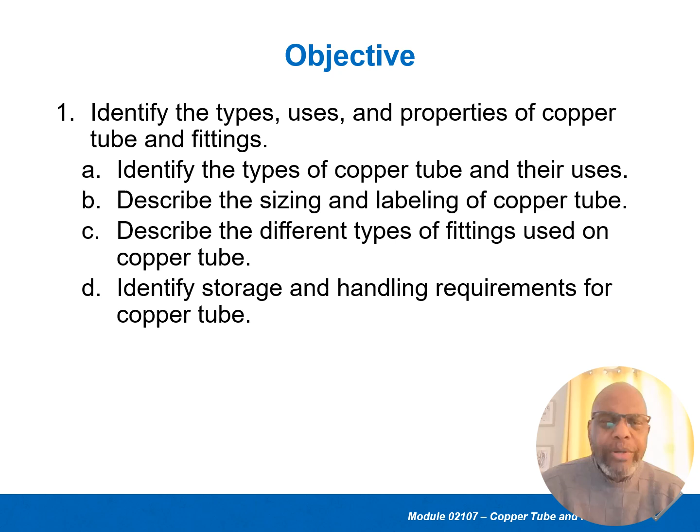This section here, we're going to be covering types of copper tubing and fittings. The objective of this section is to identify the types of copper tube and their uses, describe the sizing and labeling of copper tubing, describe the different types of fittings used on copper tubes, and identify storage and handling requirements for copper tubing.

There will be a performance task in this section, and we're going to select the types of copper fittings that's used in the plumbing industry. We're also going to identify types of fittings, valves, and their uses, and discuss why it is done a certain way.

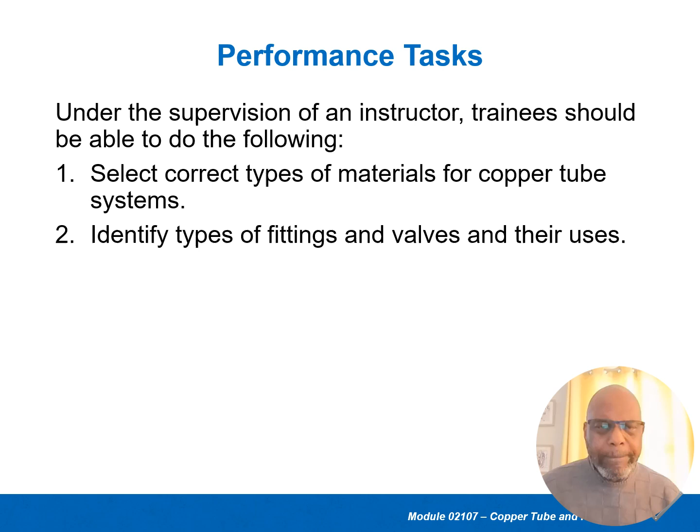So again, we said types of pipe. That's what its categories are. We find copper piping, and we call it type. The type really has to do with the wall thickness and the amount of pressure the pipe can actually handle. Actually, we call it tubing when it's copper, but if you call it pipes, other people will know what you're talking about. The true name is called tubing.

The history of it's been used for quite some time. It was more considered high end, but after years of use of other types of pipes, they found out that copper tubing has some great characteristics, such as it doesn't rust out.

It doesn't build up minerals on the inside of the piping, such as other pipes like galvanized pipes, which hot water lines will completely plug up with minerals. The second thing, black pipe will rust out in a short time. So copper doesn't have those characteristics.

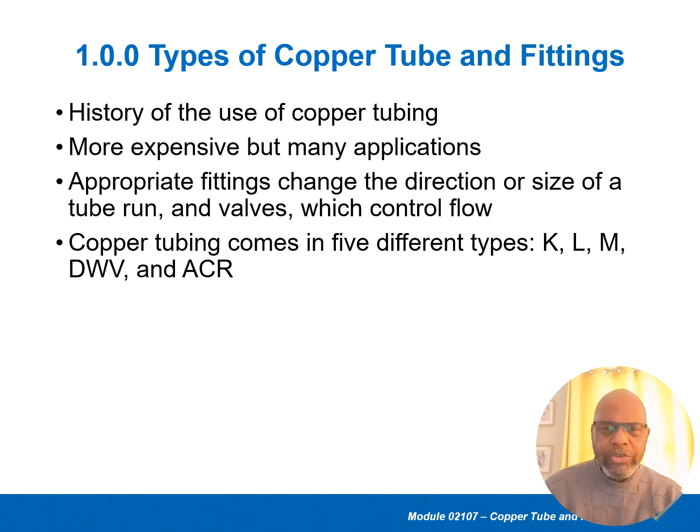Here's a warning: always check for electrical grounding when working with copper tubing. Copper water pipe lines are often used as an electrical ground, and that's true.

They will ground the water pipes because it goes into the ground for hundreds or thousands of feet, going across the ground to give a really good connection. So if there's ever a short into the house, something becomes ground faulted, it can dissipate that energy into the ground. Water pipes are always grounded, unless it's plastic piping such as PEX tubing, which may not be.

There's no reason to ground plastic pipe because it's an insulator. But if it's copper pipes or galvanized pipes or metal pipes, it will be grounded. So copper water supply lines are often used as electrical grounding.

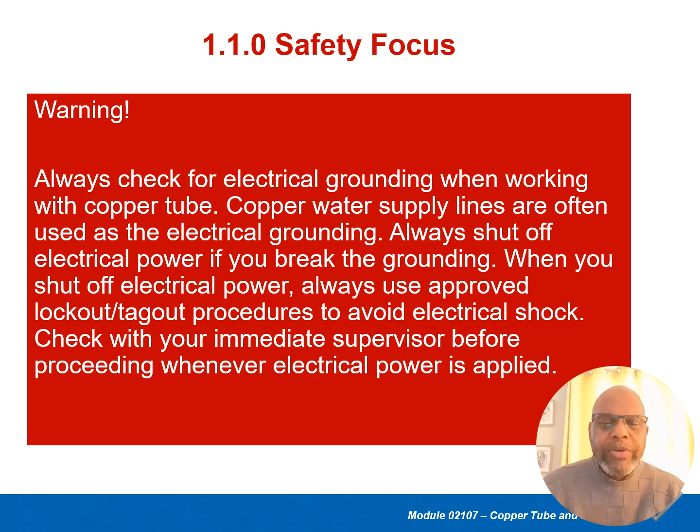Always shut off the electrical power if you break the ground. When you shut off the electrical power, always use approved lockout tagout procedures to avoid electrical shock. Check with your immediate supervisor before proceeding whenever electrical power is applied.

Okay, we're looking at the sizing. I explained the difference already. Here's the thing: the outside diameter of the pipe does not change, but the inside diameter will change. So tubing sizing varies depending on the type of copper tubing.

Types K, L, M, DWV use nominal, or what we call standard sizing. In other words, the outside of the pipe does not change, but the inside of the pipe will change. This means that the outside diameter is always 1/8 inch larger than the nominal size. So the nominal size will be the inside diameter - it's the approximate measurement in inches of the inside diameter for most copper pipes.

Type ACR uses actual outside diameter, and that's true. So HVAC, heating, ventilation, and refrigeration technicians will always use the outside diameter, and ACR pipe comes in a lot more sizes than plumber pipes, because refrigeration systems require sizing the piping correctly for the flow rate of the refrigerant going through it. So again, HVAC technicians use the outside diameter while everyone else uses the inside diameter as their nominal size.

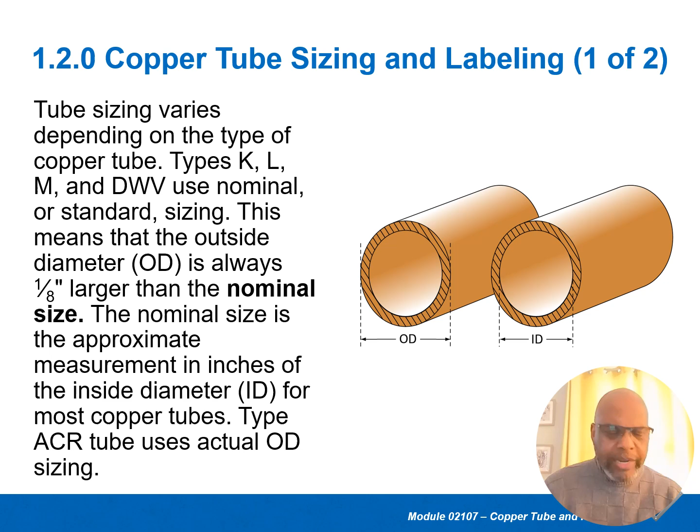Another thing is to be able to recognize the type of piping - yes, it's printed on the pipe, but to visualize it very quickly, they will color code the printing on the piping. So you will know at a glance what type of pipe you have. Type K would be green printing, L would be blue printing, type M would be red printing, DWV would be yellow printing, and ACR would be blue, because like I said, it's typically type L. But you can find type K ACR too, and the printing then would be green.

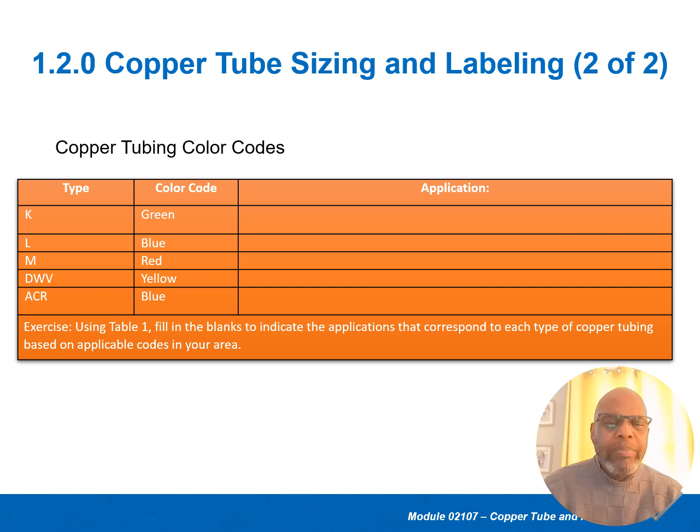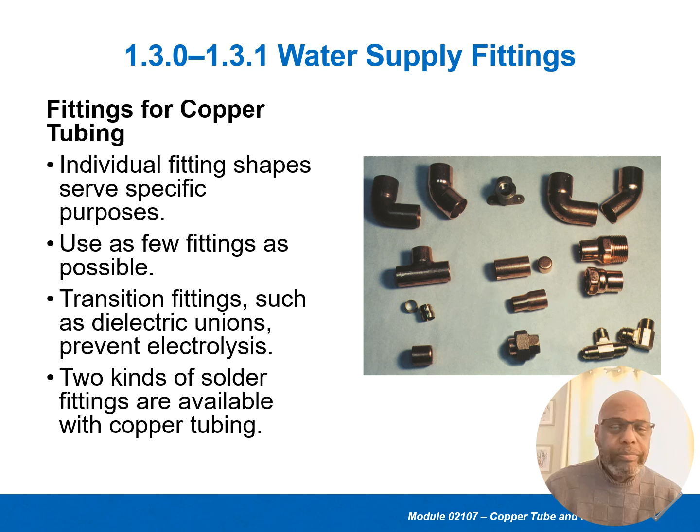These are common types of valves that you can use, and these valves are usually bronze or brass that you can use with copper. So it's the same type of valves you've seen for other uses, however it would be brass, so it doesn't have that electrolysis.

This particular valve here is a compression fitting. The valve is brass or bronze, but it will have what we call a ferrule. A ferrule looks like a wedding band - it's kind of tapered, and this nut on it would tighten up on both sides to be able to connect it to the copper pipe.

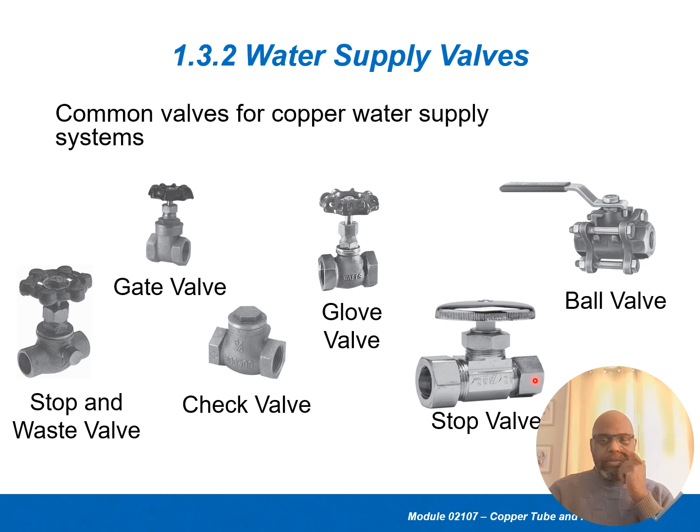So that compression fitting is a very good fitting. It's tight. The nice thing about it is it's easier to remove than a copper fitting, because all you have to do is unloosen this nut here, and you'll be able to remove the pipe from the fitting.

DWV fittings, again, these are light duty fittings that are designed for drain, waste, and vent, and they allow liquid and other materials to flow smoothly through them. Copper is a really smooth material, and it has very little resistance compared to like galvanized pipe or black pipe.

And because of copper, the nominal size inside of it is not as large as a black pipe or galvanized pipe. So that's why you can have two different sizes, or it looks like, well, physically it's two different sizes. If you look at a half-inch galvanized pipe and a half-inch copper pipe, that copper pipe is a lot smaller - it's probably almost about half the size of it.

But the galvanized pipe is actually larger because of the resistance inside of the pipe, so it's actually larger than a half inch. So if you've got a half inch galvanized pipe, the inside diameter is definitely larger than a half inch in physical size.

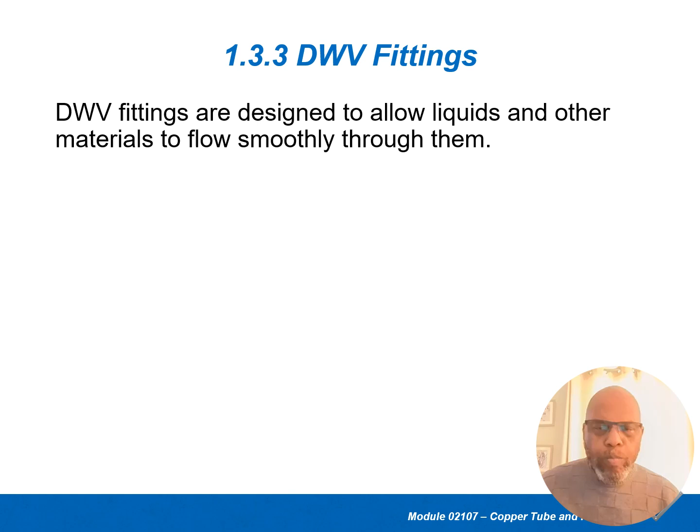So these are some other fittings that you're going to find in a field. Sweat fittings are common. Now they're coming up with a lot of other type fittings, these press fittings, used to join pipes together with a lot less effort without sweating, to speed up time. Some of these pressed fittings work extremely well, and it's a fraction of the time to install them. So you can pipe in a job a lot faster than in the past. So press fittings is one of them.

A bullhead tee, there's mechanically formed tee connections. On the inside of it there would be like a ring that actually holds the pipe together, keeps it from sliding off, keeps it from coming apart. There's an O-ring inside of it that creates a mechanical seal and holds the pipe. Of course these fittings are a lot more expensive than a normal sweat tee. But here's the difference: the time you save in labor. If you're paying somebody to pipe in a job, they're journeymen making very good money, and if you can help them complete the job in a lot less time, that time savings will offset the cost of the fittings by far.

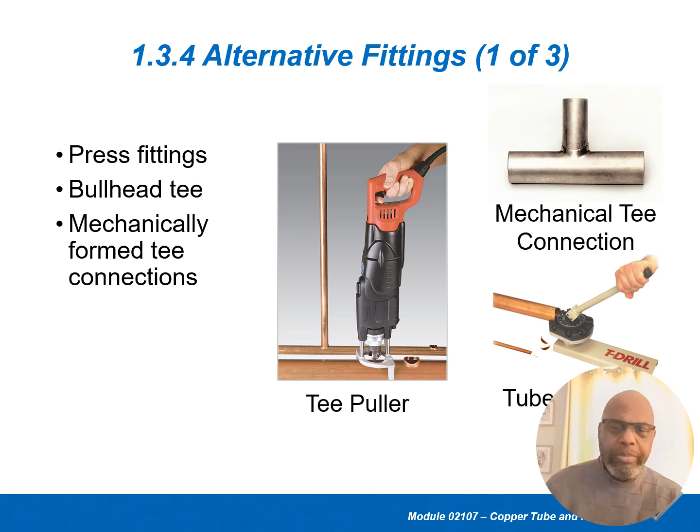These are what some people call shark bites - shark bite is a brand, but other brands make these too. These are push-on type fittings that you don't need a special tool to crimp. You just slide it on and it bites into it. It comes in all different types of fittings, so whatever fittings you can use with regular tubing, you can use with shark bite for the same thing. These are just even more expensive.

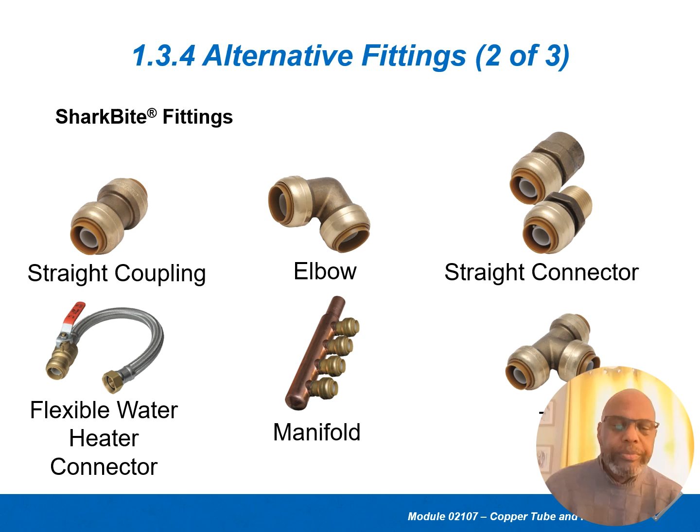Okay, these are the press fittings - these are copper fittings. This is an elbow, this is a reducer, this is a tee, all the same fittings. It looks a little different because the O-ring inside of it will seal. However, you cannot just slide it on, you have to use a tool to crimp that fitting around the tubing and it will seal it. The tool itself is expensive. I wouldn't buy the tool unless you do this on a daily basis, doing construction, because you end up spending over $1,000 easy for the tool and the fittings. You could just buy the sweat fittings and solder them in instead.

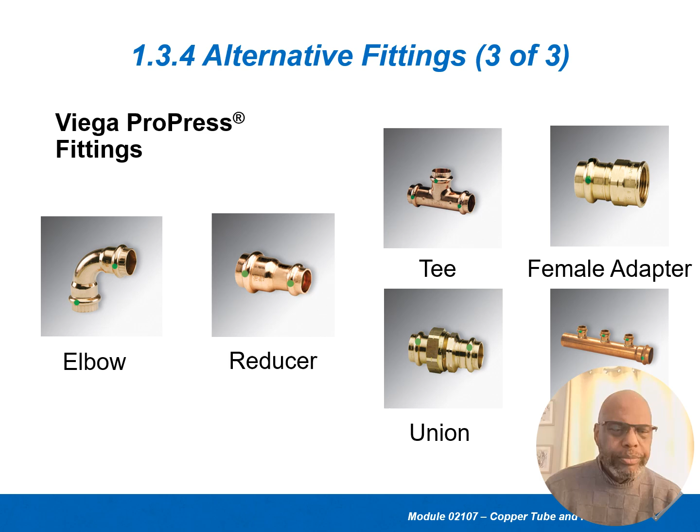Warning: always work under the direct supervision of your instructor or foreman, and always practice safety precautions to protect yourself and your coworkers from injury and to prevent equipment damage. Do not try to do any work that you have not been specifically trained to do. The reason why - you might make a mistake. You may cause harm to yourself, harm to someone else, or harm to the equipment. So again, if you don't know, ask for training.

For example, do not operate valves unless you know exactly what the results will be. Before you work independently on a system, you must know the temperature and pressure conditions that exist at every point of the system, and how those conditions can be affected by malfunctions, by the valve being in position or out of position. And that's true - I've seen guys do things and not realize what was behind their actions. I've seen things go wrong because someone opened up something or turned something on, not knowing what the outcome would be.

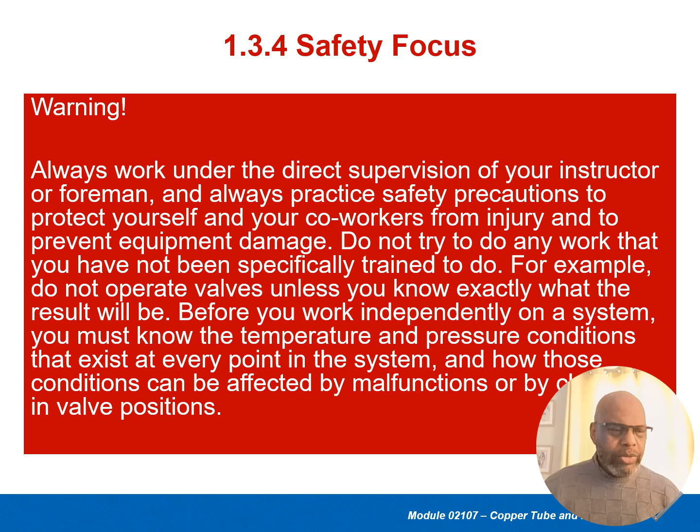Material storage and handling - just like any other pipe, we should store it properly, especially copper pipe, because it can oxidize. We see a brand new penny is nice and shiny copper finish, but an old penny is dark and dingy - that's oxidation. When that pipe changes color and becomes dark, it will not be able to be soldered, it will not stick to it. You could not use your solder to join it - it would just run off of it. So copper pipes have to be clean for a good fitting when you're sweating it.

Take proper steps to store copper securely and ensure that the building is locked at the end of the workday. The reason why is copper is expensive, and people steal copper to sell or scrap it. I have been on jobs where people have stolen copper off the job, and of course it ends up at a junkyard or scrap yard.

Store tubing and fittings near where you'll be working so they are easy to access, and organize the tube and fittings by groups, by tube size and type. Be careful not to bend or damage the tube and fittings. Here's a big thing: if you bend either the fittings or the tubing, it's not going to fit.

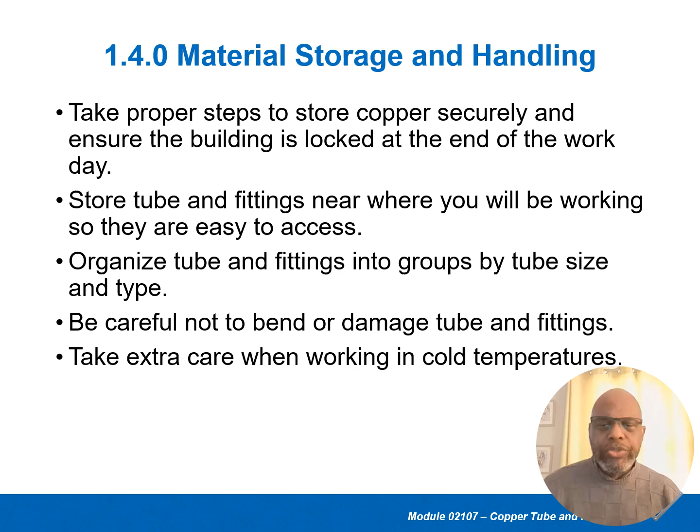Annealing is a process of slowly cooling the copper to relieve the internal stress. This process reduces brittleness and increases toughness.

Bullhead tee is a tee fitting used on a branch that is larger than the main line, or that has one outlet larger than the run openings.

Compression joint is a method of connecting in which tightening a threaded nut squeezes the compression ring to seal the joint.

Drawn copper is tubing produced by pulling the tubing through dies to reduce its diameter. The drawing process brings the copper to the proper size and makes it very rigid.

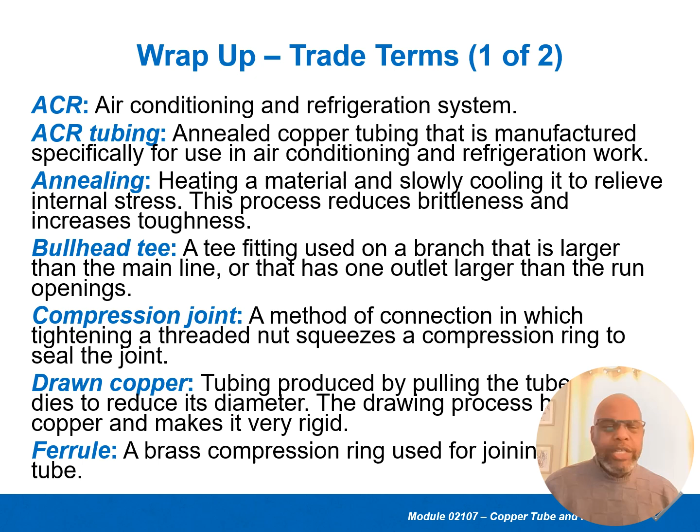A ferrule is a brass compression ring, it looks like a wedding band for a man. It's brass and fits around the tubing, used with a compression fitting and a compression nut to tighten that ferrule onto the copper tubing. Once it's tightened down, that ferrule cannot be removed, it becomes really part of that pipe. It's made out of brass, which is a soft, malleable material. So when you use a compression nut and a compression fitting, it actually joins it to the tubing.

A flare joint is a special type of fitting we use for copper piping. For certain joints, we have flare fittings. The end of the tubing is flared, and so we have a flare nut and a flare fitting. It's similar to a compression fitting, but the difference is that it doesn't have a ferrule, and we actually flare the end of the tubing.

I'll post a video to show you so you can see what a flare fitting and a compression fitting is. For a flare fitting, we use a special tool called a flaring tool to flare the end of the tubing, and it's a very specific process to flare the end of it.

So it's a fitting in which one end of each tube to be joined is flared outward using a special tool. The flared tube end mates with the threaded flare fitting and is secured with a flare nut. These flare nuts are what we tighten down to the flare fitting, and the tubing is actually sandwiched between the flare fitting and the flare nut. Once I show the video, you'll be able to see it.

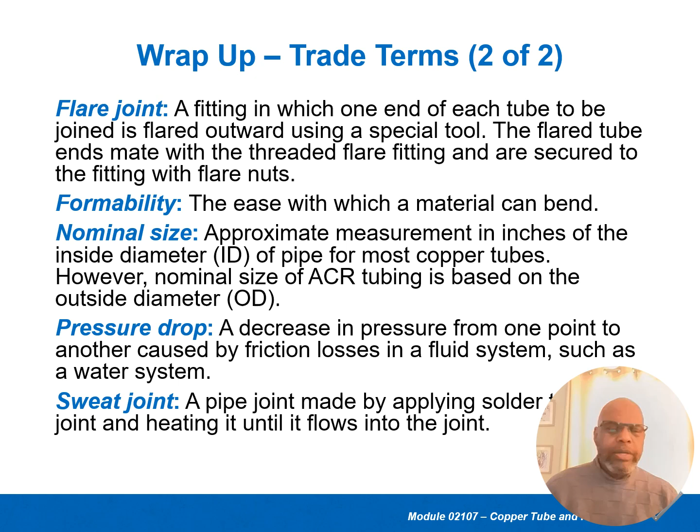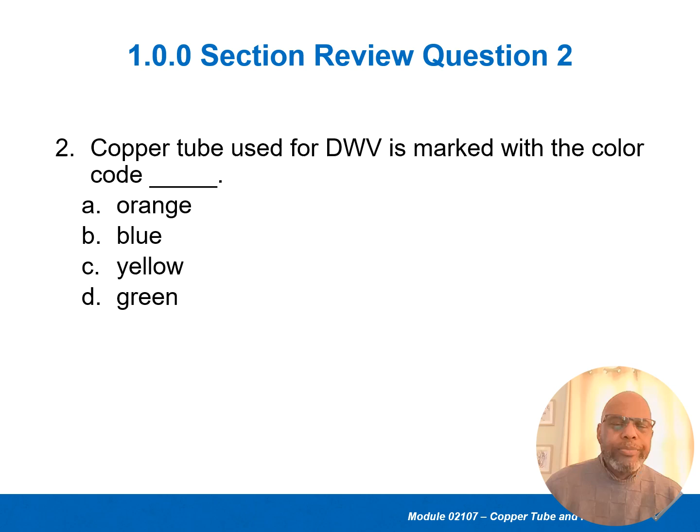Which of the following is true with regard to fittings? A says fittings can be used to reduce pressure drops. B says use as few fittings as possible. C says solder fittings are slightly smaller than the tubes to be joined. D says sweat fittings are used with threaded tubing.

Let's start backwards. D is wrong - sweat fittings are not used with threaded tubes. A says fittings can be used to reduce the pressure drop - no, fittings actually add to a pressure drop. In fact, one fitting making a 90-degree turn can add about 2 to 3 feet of equivalent length of piping. So if we have 5 fittings, that's like adding 15 extra feet of piping, the resistance of 15 feet of piping. C says solder fittings are slightly smaller than the tube - no, solder fittings are larger because we slide the tubing inside of the fitting. So the correct answer is use as few fittings as possible.

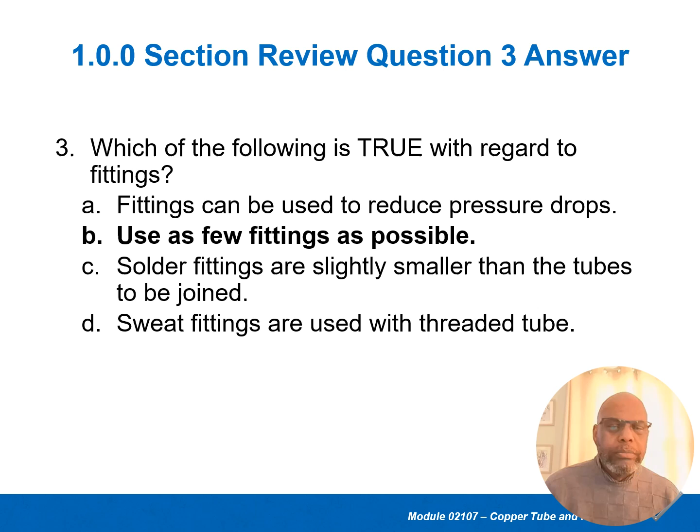Copper tubing is a good conductor of heat, and the heat can leave it to match the air temperature around it, because heat travels from a warm source to a cooler source. So that copper can suck the heat out of your hands very quickly. Copper is an extremely good conductor of heat energy - it can extract heat from your hands while holding cold copper, compared to other materials. Since it's such a good conductor, and your hands are warm, copper tubing can be very cold outdoors in cold temperatures, so you must be careful.